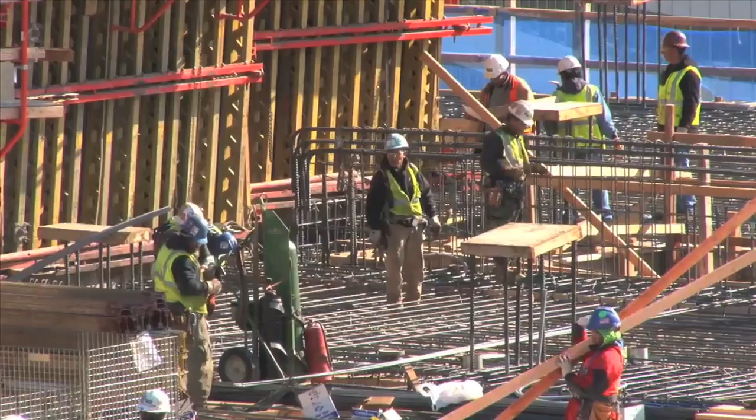The built environment provides the backdrop to our everyday lives. It plays a significant role in forming our natural, economic, and cultural perspectives. There are enormous challenges facing our planet today, and the built environment, as one of the main consumers of energy and resources, offers us a plausible framework to address these issues. Green building gives us a viable way forward in constructing healthy indoor and outdoor spaces, reducing our collective ecological footprint, and in taking our next great leap as a society in the necessary transition to a sustainable built environment.

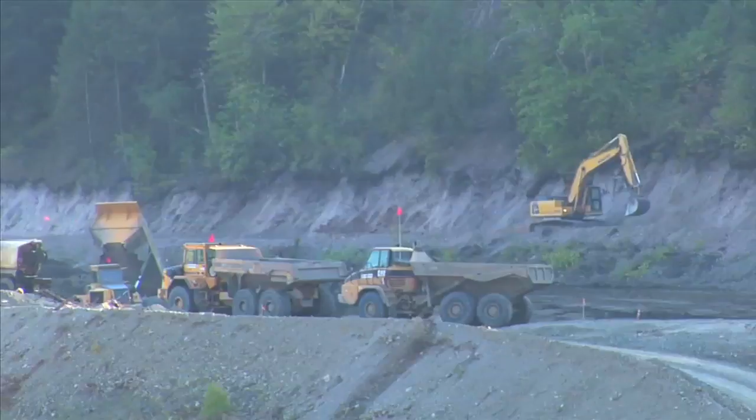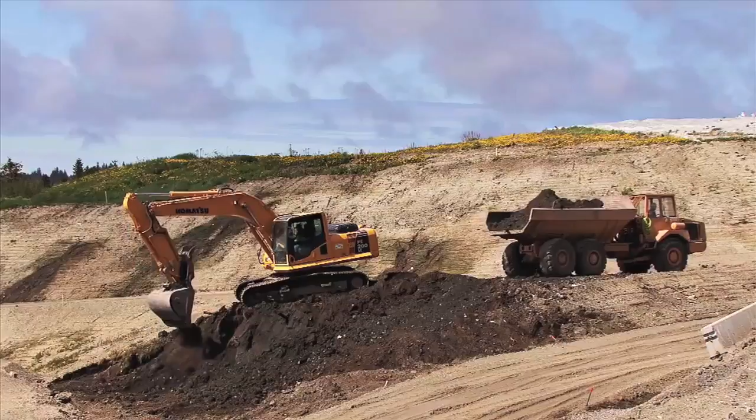Buildings consume significant resources during their design and construction, both in terms of capital and raw materials. The clearing of land for development, which in many cases involves forest clear cuts and bulldozers, throws the delicate ecosystem right out of balance. This doesn't even mention the extraction, manufacturing, and transportation of these building materials, which pollutes the air, land, and water. Sustainable design and construction, often called green building, is a fundamental necessity to help us blunt the worst effects from climate disruption. Green building reduces environmental damage and pushes project teams to reach ever higher in pursuit of regenerative buildings, which inherently do more good than harm to the natural environment.

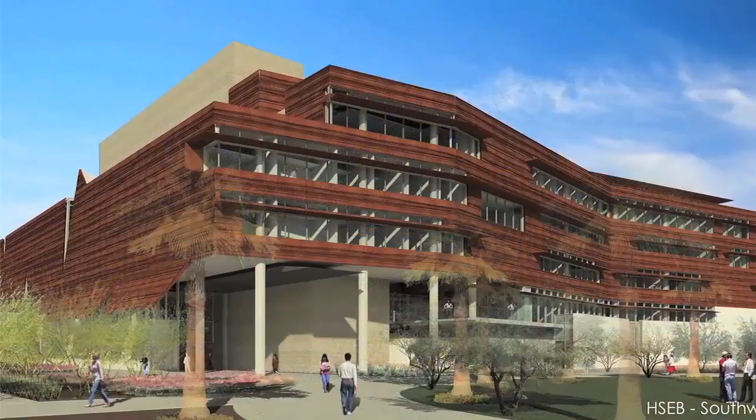The U.S. Green Building Council was formed in 1993 to promote and encourage green building. The mission of USGBC is to transform the way buildings and communities are designed, built, and operated, enabling an environmentally and socially responsible, healthy, and prosperous environment that improves quality of life. USGBC develops the LEED Green Building Rating System as a primary tool in service of this mission. LEED stands for Leadership in Energy and Environmental Design and recognizes best-in-class design and construction practices. This comprehensive free online course will provide you with everything you need to know to pass the LEED Green Associate exam, which demonstrates an understanding of these environmental imperatives and a basic understanding of the LEED Green Building Rating Systems.

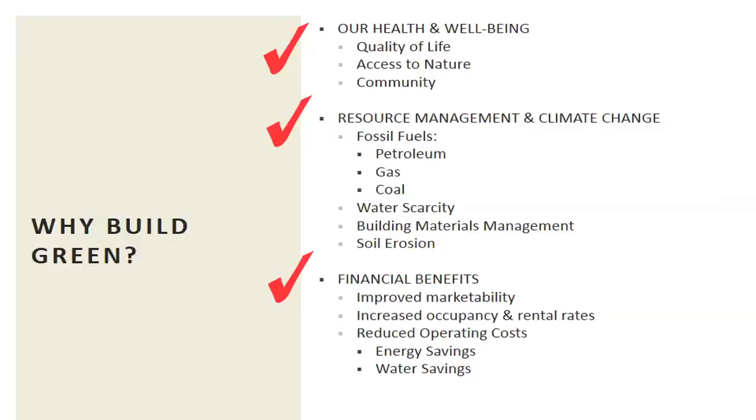Following the idea of the triple bottom line, we consider how each of the three aspects relates to the built environment. Our health relates to people. Resource management is the planet or the environment. And finally, the financial benefits relate to economics and profit, which definitely deserves a place in this triple bottom line.

With LEED fundamentally an instrument of market transformation, it's important for LEED to engage building project teams by tying these program requirements—collectively known as credits, prerequisites, and minimum program requirements, more on that in a bit—to specific goals that the LEED program is trying to attain.

Now let's talk about the three concepts that are at the very heart of this course: USGBC, GBCI, and the LEED Green Building Rating System.

USGBC is the United States Green Building Council. The vision of USGBC is that buildings and communities will regenerate and sustain the health and vitality of all life within a generation. This represents the long-term view of USGBC.

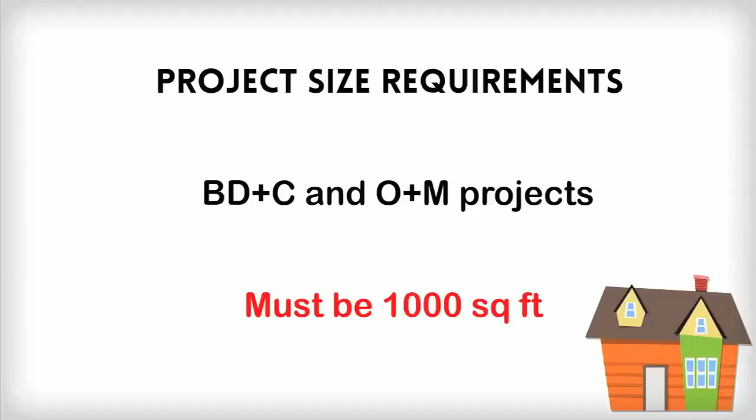Interior projects can be as small as 250 square feet, so they can be pretty little, but you can't have a fuel station kiosk or something like that qualify. Now, LEED for neighborhood development projects need at least 2 habitable buildings, and they have a maximum size of 1,500 acres.

And then finally, LEED for homes projects must meet the definition for a dwelling unit, which includes permanent provisions for living, sleeping, eating, cooking, and sanitation. What this means is that a dorm room with a shared restroom could not be a LEED for homes project.

However, the building as a whole could be eligible. To contrast that, your typical apartment that does have all of those provisions that make it a dwelling unit - sleeping, eating, cooking, sanitation, and living quarters - would qualify for that minimum program requirement.

So let's take a closer look at number 2 here when we talk about LEED boundaries. The LEED boundary needs to include the project area as well as parking if it's applicable. While this means that there can be more than one acceptable boundary for a project, these are declared by the project team and either accepted or rejected at face value by the LEED reviewer. So the project team has a degree of discretion.

The one commonality that all LEED project boundaries absolutely need to abide by is that they have to be consistent across all credits. And ultimately, the LEED reviewer has to accept the project team's designation of that boundary.

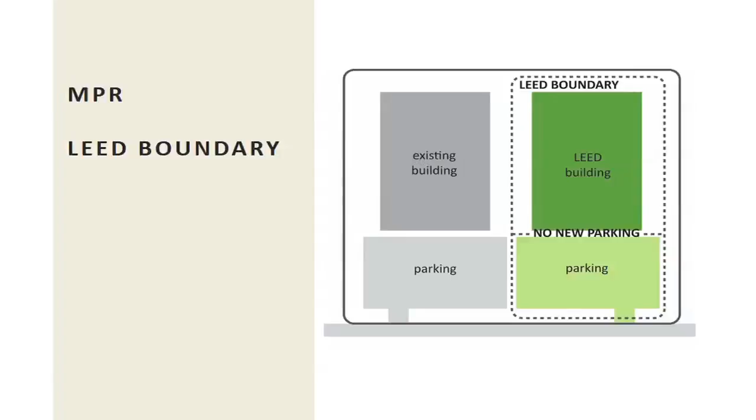Some projects may involve multiple concurrent LEED applications or be located on a campus with shared resources. These can comply with LEED using the campus guidance document provided by USGBC. Let's take a look at what that means.

The campus approach uses the site area of the entire campus for certain eligible credits. For example, rainwater management is a credit in the Sustainable Sites category of LEED, and it involves managing the rainwater that falls on the site and, generally speaking, infiltrating it on the site. It's a little more complex than that, as we'll see when we get into that category, but big picture, you need to infiltrate the majority of that rainwater on your site.

There may be cases where it's most appropriate to infiltrate it on a different parcel of the same campus. This guidance document clarifies how LEED projects can do that within the scope of the program. So for rainwater management, you're free to infiltrate it anywhere on a contiguous portion of the campus—it could be 100 feet away, or for very large campuses, a mile away. The critical part is that it's infiltrated on the campus master site itself.

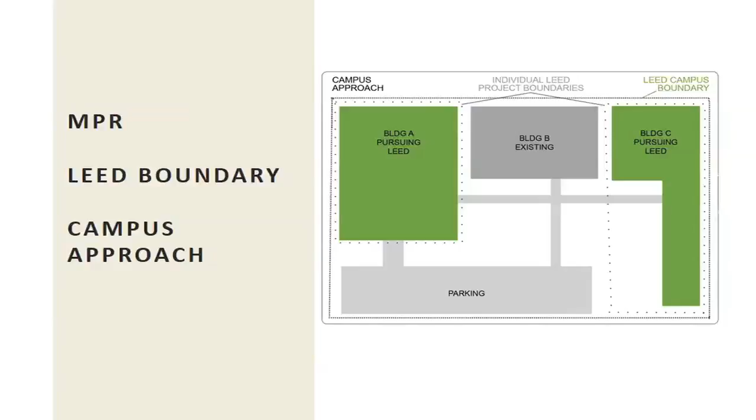Another shared element would be parking. The LEED project boundaries don't include the parking, but the LEED application would need to address the parking attributed to the building—in this example, accessible to Building A and/or Building C occupants. So the parking spaces need to be factored in where appropriate, but the parking lot itself, and things like the construction waste of creating it, would not be included.

LEED uses a term called FTE that's pretty important—it comes up a lot within the rating system. FTE is short for full-time equivalent. Let's take a look at what that means.

One FTE equals one individual in a building for 8 hours a day, 5 days a week. Another way to think about it is one person in a building for 40 hours every week—it doesn't have to be a set number of days, really it's just hours per week. So one individual could equal exactly one FTE, but say a part-time employee who works 6 hours a day, 5 days a week, would not be an entire FTE—they'd be a fraction of an FTE. If it was 6 hours, that would be 3/4 of an FTE for that individual. It's also possible for a single individual to count as more than one FTE.

This matters because we look at FTE to define how many uses per day certain building amenities will see. For water fixtures, you use the FTE calculation to determine how many times occupants will use those flush and flow fixtures during a basic day. So a part-time employee who's there 4 hours a day would be expected to use those same facilities only half as frequently as a similar individual in the building for 8 hours a day.

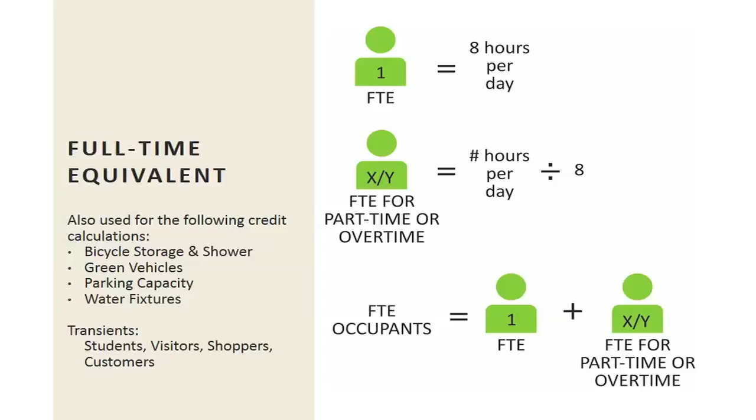So now that we've talked about the minimum program requirements necessary for a project to even be considered for LEED registration, let's take a look at how many of these rating system adaptations, such as LEED for building design and construction, new construction, or LEED for operations and maintenance existing buildings, apply to buildings at different points throughout their life cycle. All of these rating system adaptations are listed along a timeline axis based on design, construction, and operations.

Now, while all of the rating systems, with the exception of operations and maintenance, cover both the design and construction of the building, the operations and maintenance rating system really comes in after the fact and is suitable for either buildings that are in place today, or maybe a building that either did or didn't get a new construction certification and is looking to demonstrate operational excellence through a LEED O&M certification.

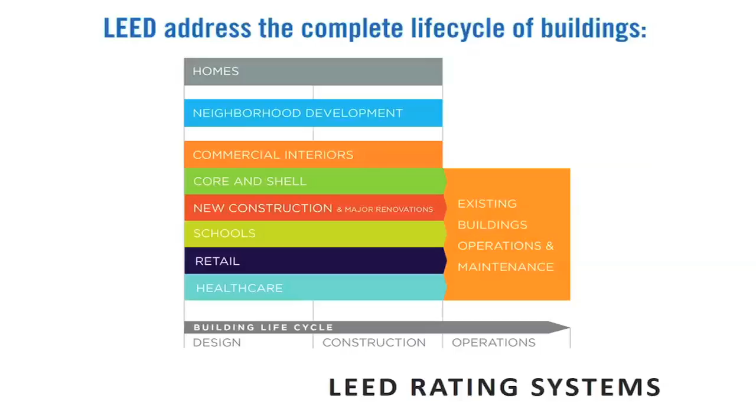It is possible, with that in mind, to have a double LEED certification for a building. So while, say, a new office building's going into a downtown core, it can certify under LEED for new construction, and then it can additionally get that O&M certification. So it can have a plaque on, for example, each side of the entry doorway.

So let me first clarify a term which we've touched on a couple of times. The term rating system refers to that top order category, so that includes building design and construction. And the term rating system adaptation refers to the specific suite of credits applicable to a project based on its building type, such as a school.

So let's take a look at where each rating system is used and then talk about those adaptations. First rating system we talk about, and the one that's really the primary focus of this course, and it's certainly the most well-known LEED rating system, is LEED for building design and construction. You'll also hear me use the term BD&C, that's really just the acronym here. So within that one rating system are these 8 adaptations: LEED for new construction and major renovation, LEED for core and shell development, LEED for schools, retail, data centers, LEED for warehouses and distribution centers, LEED for hospitality, and finally LEED for healthcare.

These projects are whole building design and construction, or major renovation. So a new building, with the exception of LEED for homes, would always fall within this category. Now, the major renovation part is a little bit tricky.

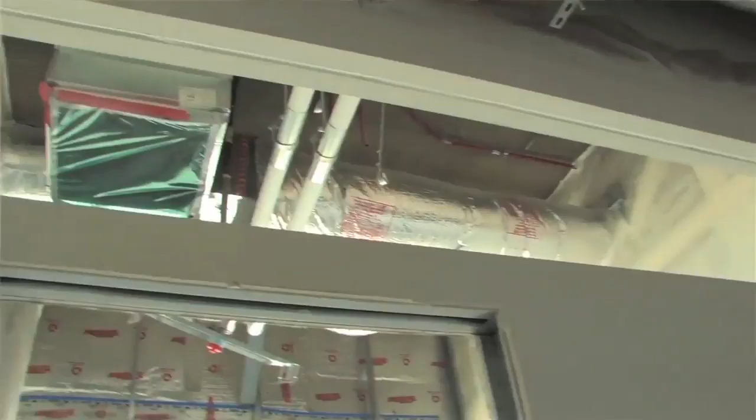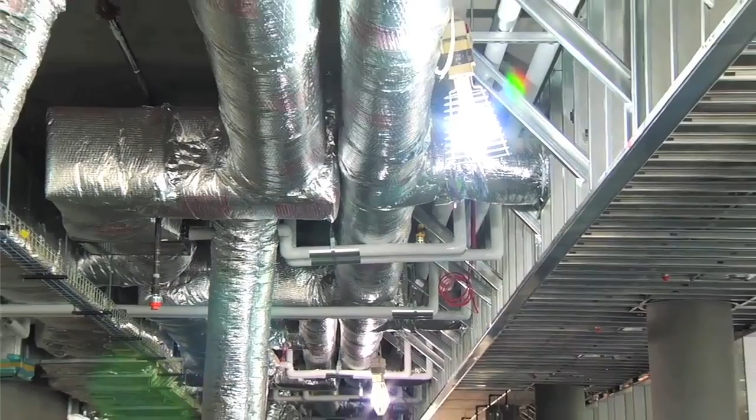There's kind of a fine line between what would be a LEED for operations and maintenance project versus a LEED for building design and construction project. And really the important factors are how significant this renovation is. So there's going to need to be a major HVAC, or heating, ventilation, and air conditioning, renovation included within the scope. And the reason for that is that there are commissioning requirements fundamental at the prerequisite level within LEED for building design and construction. And if there is no new or major renovation to the HVAC system, it's not necessarily possible that it could even be commissioned.

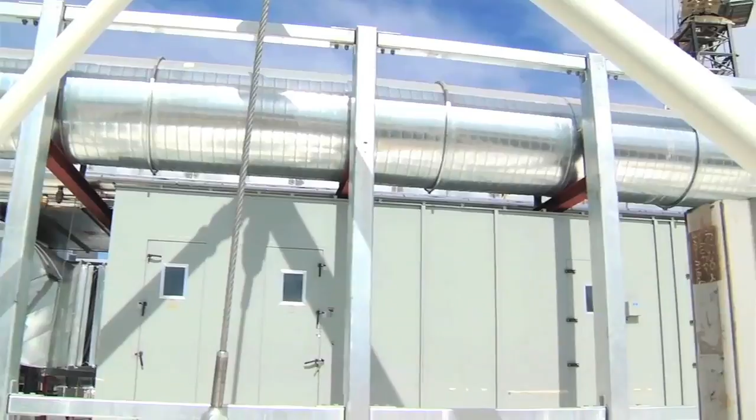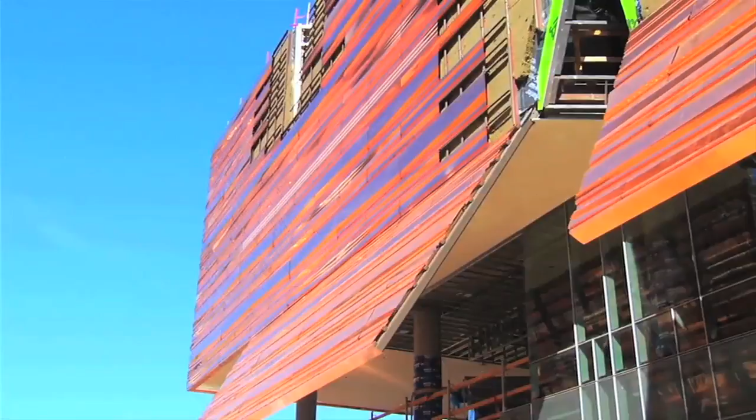In addition, there needs to be significant envelope modifications. And that's really not an absolute, in the sense that if for some reason you found yourself with an existing building that was already sufficiently energy efficient, then it could technically be possible, but that's really going to be the outlier in terms of likelihood. Whereas if you go into a major renovation project, it's quite likely that this is an older building where the glazing system and insulation really isn't up to par with where it would need to be to meet those minimum energy efficiency requirements of LEED.

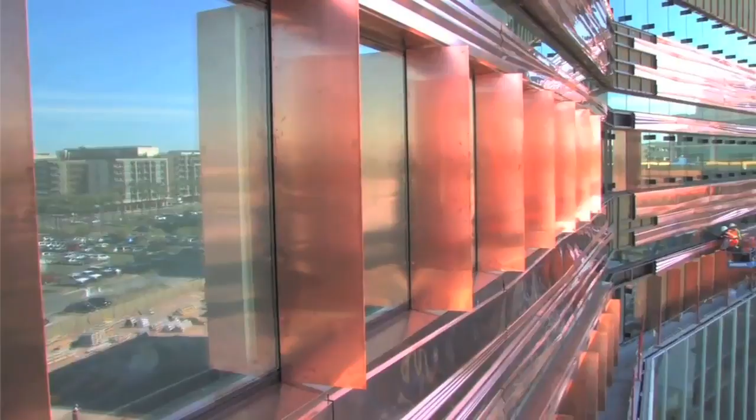Now I'll mention one quick distinction. The core and shell development project is really much different than the rest of these. Core and shell certification does not include the building interior. When we talk about the interior design and construction rating system, those often are projects within a larger building and are exclusive to the interior, whereas core and shell is the complete opposite. That's creating the core and shell of a building while leaving the interiors incomplete, or at least outside the scope of the core and shell development project. So that would be not for a completed occupiable building, but just for that core and shell.

Now, the next rating system we'll talk about is interior design and construction, or ID&C. There are 3 adaptations here: commercial interiors, retail, and hospitality. These are complete interior fit-outs of a tenant space. It may be that they're moving into a new empty core and shell space with or without existing lighting or heating, ventilation, and air conditioning, or it may be that they're doing a new interior space, remodeling one that was previously done. So either type of project fits within the scope of ID&C, but it's fundamentally the interior only.

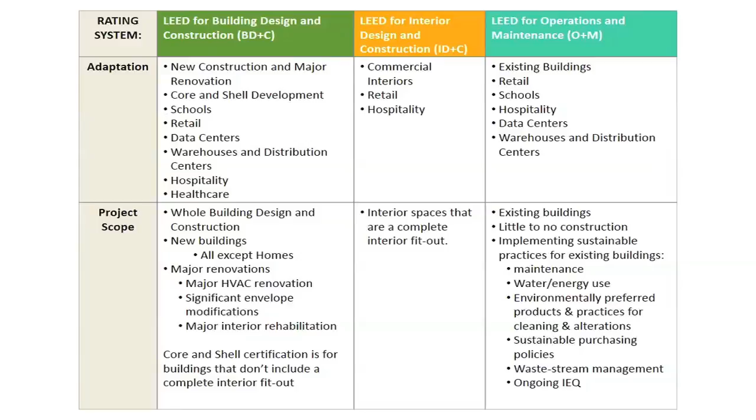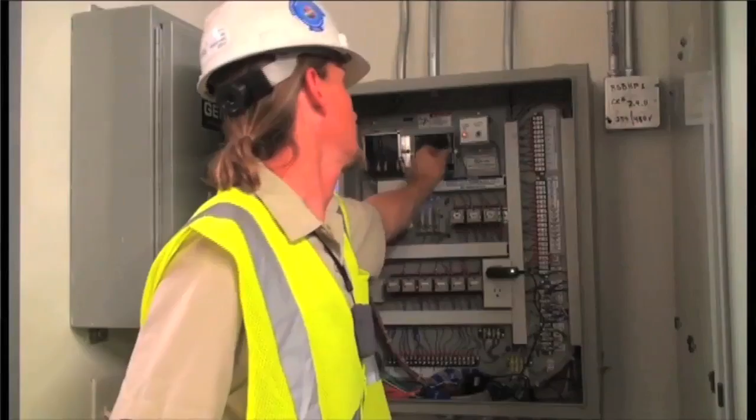And the last rating system we talk about on this page, and then we've got 2 more to cover, is the LEED for Operations and Maintenance program. There are 6 adaptations here: existing buildings, retail, schools, hospitality, data centers, and warehouses and distribution centers. Now these are already completed buildings, and there's typically little to no construction required as part of the O&M certification process. There may be a remodel or that kind of thing that happens in parallel with the O&M certification effort, but it's not required to meet the program requirements. The program instead focuses on sustainable operational practices such as maintenance, water and energy use over time, processes and purchasing policies, waste stream management, and an ongoing commitment to maintaining exceptional indoor environmental quality.

Now, our last 2 rating systems are LEED for Homes and LEED for Neighborhood Development. Both of these have 2 adaptations within them. LEED for Homes has the homes and multifamily low-rise adaptation and the multifamily mid-rise. The project scope here is single-family homes or multifamily residential buildings up to 8 stories. Now, those very large residential projects, say a 9-story condo building, that would be LEED for New Construction. Additionally, there must be at least 1 complete dwelling unit within the building, which includes provisions for its own cooking and its own restroom.

Now, there is a distinction between these 2 adaptations, and that's based on the number of stories in the building. A 1 or 2-story building would always fall into that first adaptation, the homes and multifamily low-rise. Anything from 6 stories and up to 8 would be multifamily mid-rise. Now that mid-range, the 3, 4, or 5-story project, could go either direction depending on the Energy Star category that it fits into. The Energy Star program is pretty important across many of the LEED rating systems, and they use a parallel set of criteria to place these homes in one adaptation versus the other, depending on how Energy Star sorts them.

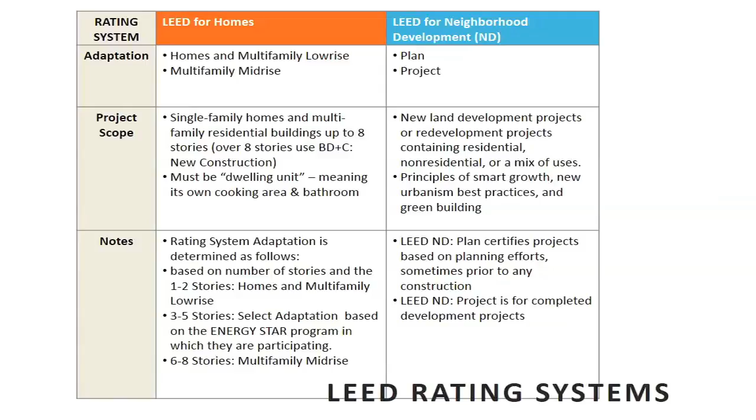And then our final rating system is LEED for Neighborhood Development. There are two adaptations here, and they represent different scopes of what could be the same project. On one hand, we have plan, which represents the planning effort itself and could even be secured—you could have that plan certification in hand before you even break ground on the neighborhood. Now, the project certification, that's really the completed neighborhood, representing a completed neighborhood that's been assessed to meet all of those principles of smart growth, new urbanism best practices, as well as sustainable green building.

So we're trying to show a lot of information here on this one slide, and it may be a little difficult to read, but let's take a look again at those rating system adaptations and how they line up under those rating systems, which are parallel to the distinction made for reference guides. USGBC has created resource books for these rating systems, called reference guides. Each rating system has its own reference guide, and within that reference guide are all of the adaptations represented here on your screen. We've got 8 under BD&C, all the way down to the 2 versions of LEED for Neighborhood Development. Now, the most widely used reference guide is the reference guide for building design and construction, shown on the left here in this graphic.

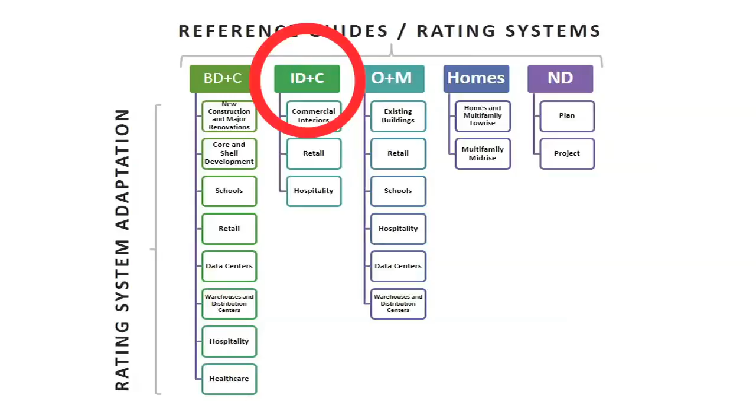The adaptations found in just that one book are NC, CS, schools, retail, data centers, warehouses and distribution centers, hospitality, healthcare—so it's actually a pretty thick book. The interior design and construction book has commercial interiors, retail, and hospitality, and so on. The final thing I'll point out is that these line up not only in terms of rating systems and reference guides, but also in the same distinction between the same 5 categories when we're talking about specialty credentials available as a LEED AP.

You'll recall that there are 5 specialty credentials available for LEED AP credential holders, which is the optional next step after you've completed your LEED Green Associate credential. These 5 categories are universally used in all 3 of those distinctions.

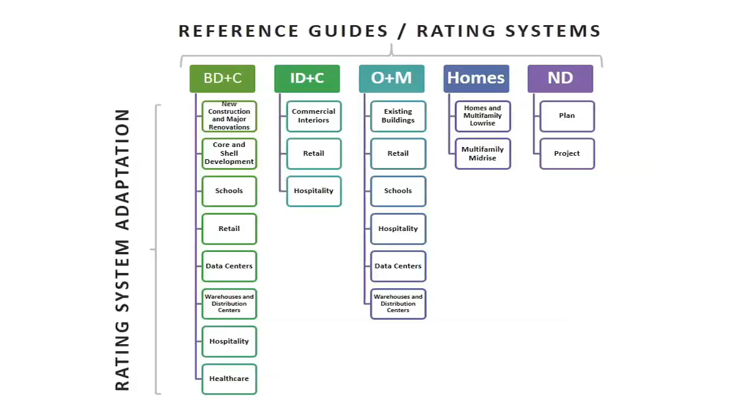We have several sample questions here as part of this course, and just to get you oriented a little bit, what we'll do is read the question and then give about 10 seconds so you can jot down your answer on a notebook. If you feel you need more time, feel free to pause the presentation, record your answer, and then hit play to see if you've gotten it right.

So our first question: what is the first level of LEED certification called? Again, about 10 seconds, and then we'll look at the answer.

Now our next sample question. An existing building on a campus is going to be renovated. The building will only be repainted and some light fixtures will be replaced. Which LEED rating system adaptation would you use?

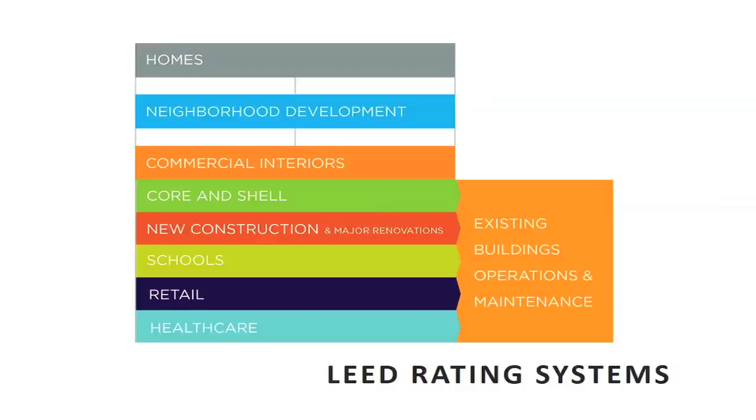So now let's look at the components of each. Within each LEED rating system there are categories, and within most of these categories are credit prerequisites. These offer no points to your project, but fundamentally every single prerequisite needs to be achieved. If even one prerequisite is not completed by the project team, the building will not be eligible for LEED certification.

So when considering LEED for a project, the next step after determining that your project meets those minimum program requirements, or MPRs, is to make sure your project can meet all of the prerequisites for the appropriate rating system adaptation. In addition to prerequisites, there are also credits within each category that offer points to your LEED project to determine the certification level—this includes LEED Silver or LEED Gold, as we've discussed.

Credits can be worth a different number of points because they don't all have equivalent environmental benefit. So while we have 100 base points, those same 100 points are spread across several credits, worth in some cases up to 20 points each. Some of these credits offer a way to go above and beyond, known as exemplary performance, and those points are actually tallied in the bonus category we've talked about—the innovation category.

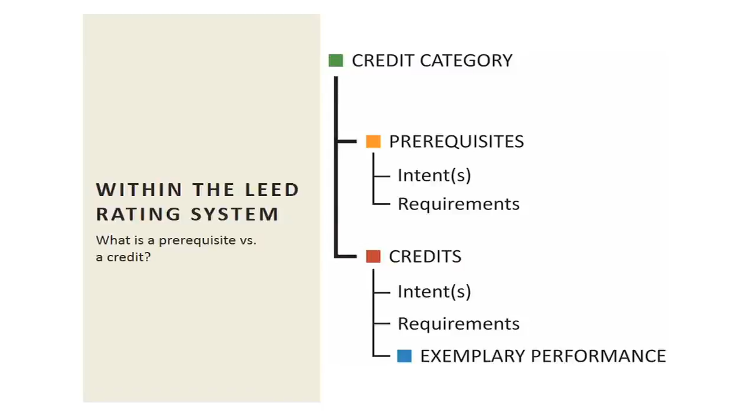Now these 6 categories, 5 entries, but we group sustainable sites and location and transportation as they really have a lot of parallels between the two. These categories represent the core categories, and they are used in all of the rating systems with the exception of LEED for neighborhood development.

LT is short for location and transportation, and deals with site location, transportation, as well as the connection to the broader community.

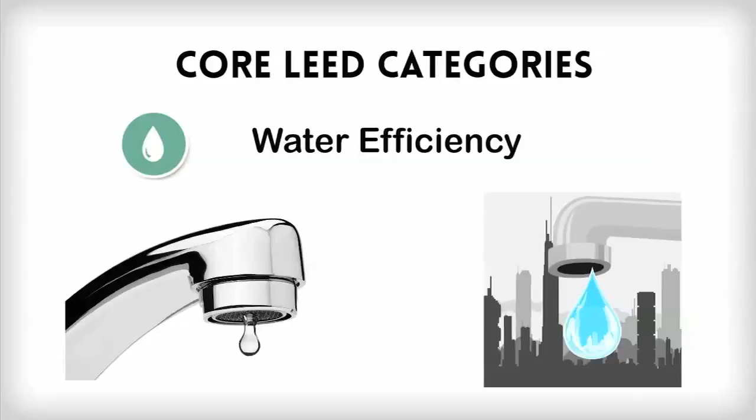The SS category, for sustainable sites, represents site selection, site development, and how the project fits into the fabric of the local ecosystem. The WE category stands for water efficiency and addresses both indoor and outdoor water uses, and innovative technologies such as strategies to reduce the amount of potable water that you need in your cooling tower.

The EA category, or energy and atmosphere, looks at using energy efficiently, reducing the grid sourcing of energy needs, and then operational optimizations, including minimizing the direct atmospheric damage that can be done by refrigerant.

The MR category, or materials and resources, addresses life cycle impacts. This includes recycled, regional, rapidly renewable, etc., end of life, as well as product disclosures that are really starting to get a lot of traction here within the industry.

And finally, the EQ category, or indoor environmental quality, represents human health as well as comfort within the building and the connection to outdoors.

And then finally we have LEED for neighborhood development. So what we've looked at here is how the rating systems are consistent and similar, and how LEED for neighborhood is very different, as the scope of work for that program is much larger, and for that reason it focuses on other categories that are more broadly focused.

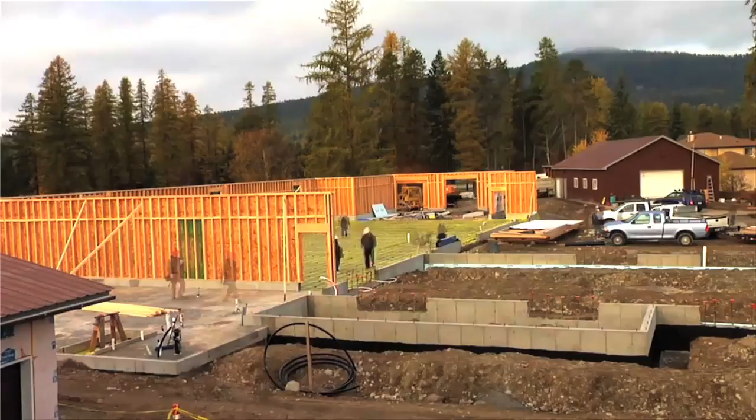Now, the other 2 categories are NPD and GIB. NPD addresses what to build, or neighborhood pattern and design, that is, what to build. Also, how should it feel in terms of the broader community? So should this parcel be dedicated to shops or a park, or should we put some homes here? It also encourages development that is pedestrian-oriented, compact, and diverse.

And finally, green infrastructure and buildings. This encourages both individual green buildings as well as broad strategies such as neighborhood orientation to help set the stage for the future success of these buildings.

Okay, the correct answers here are 1, 3, and 4: that all prerequisites are required based on the rating system adaptation is true. That LEED categories differ depending on the rating system is also true. And that credits within each category offer potential project points, which determine the LEED certification level, is also true. Now, the one that isn't true is that registration is awarded when a project completes all LEED prerequisites. That is false. Registration is granted, not really an award, since there's no assessment of performance that backs up the registration. The registration is granted as soon as the project pays their registration fee and uploads some basic information to LEED Online.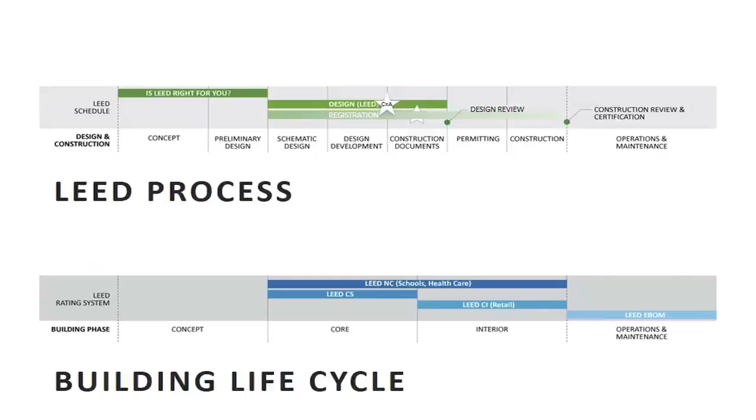Finally, most of the other rating systems, including LEED for New Construction, LEED for Schools, LEED for Healthcare, and really all of the building design and construction rating system adaptations, with the exception of Core and Shell, address both the core and the interior of a building. The operations and maintenance side is addressed exclusively by the operations and maintenance program, including the adaptation for existing buildings. Central to successful LEED projects is an integrative process.

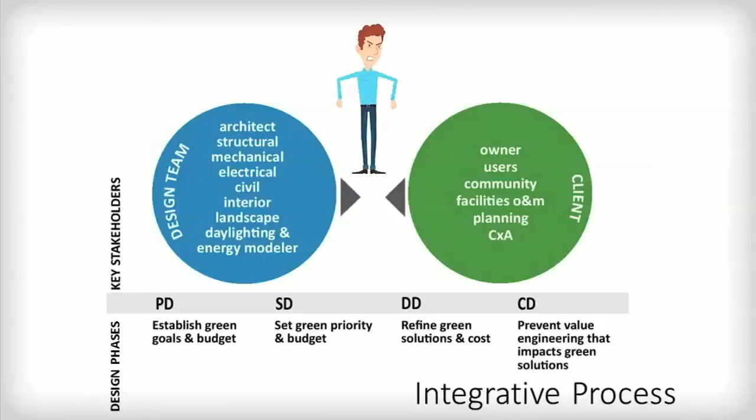So what we see here is a bid project, one where the contractor and their team are not involved during design, but of course the design team and the client or owner are at the table. Now, the typical planning and design process is one of relying on the expertise of specialists who work in their respective specialties, somewhat isolated from each other in their own respective cylinders of excellence.

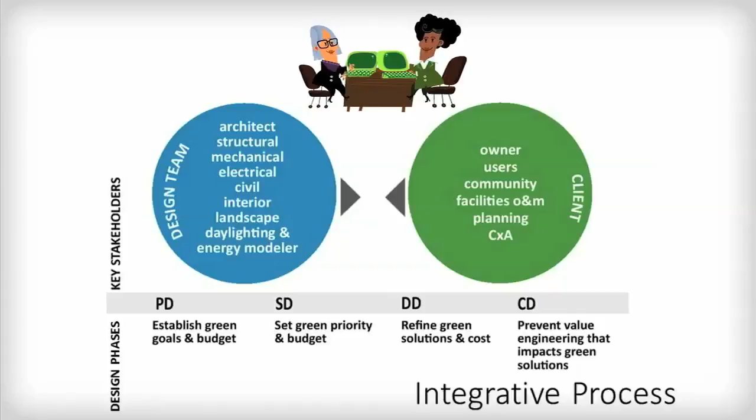Now, the architect is typically the one tasked with being the conduit of communication. So it may be that the civil engineer reports to the architect, who filters that information and disseminates it as appropriate to, say, the landscape architect and the plumbing engineer. That would be essentially where you've got one single party really overseeing all of the communication.

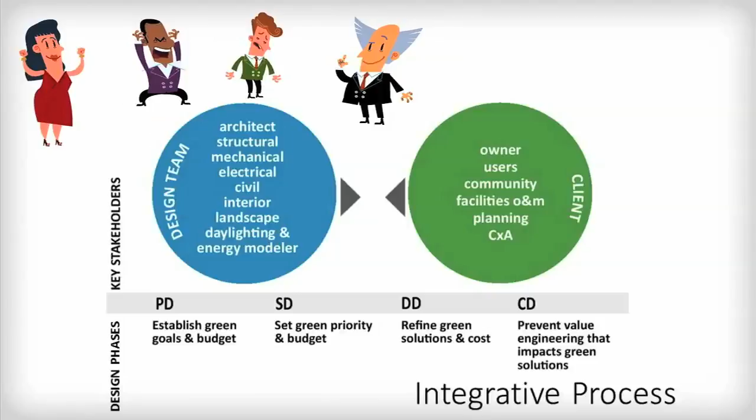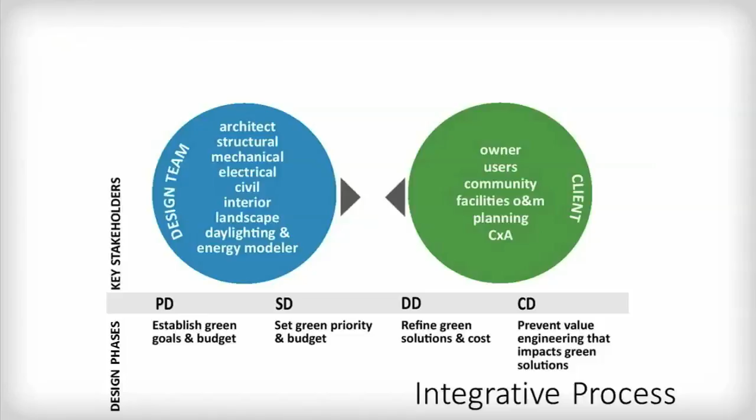Now the integrative approach is one that asks all the members of a project stakeholder community and the technical planning, design, and construction team to look at the project objectives, the building materials, the systems and assemblies, and the like from many different perspectives. What this means on the ground is that several whole team meetings throughout the design phase involving all those stakeholders are convened, and they evaluate the cost, quality of life, future flexibility, efficiency, and the overall environmental impact of these design decisions.

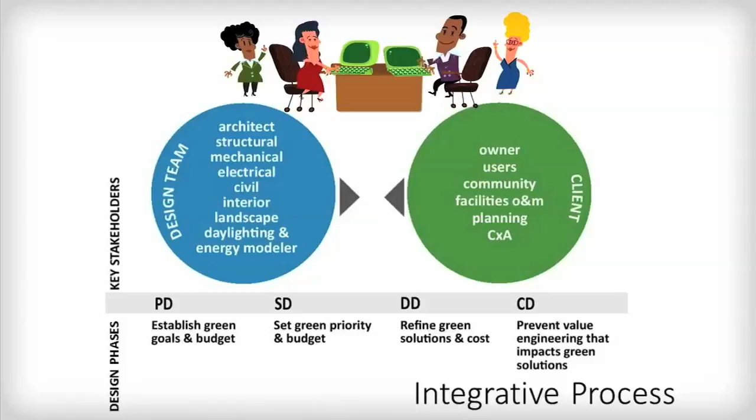This typically begins with a design charrette, sometimes called an eco-charrette if it's focused on ecological or sustainability issues, which is a focused collaborative brainstorming session held at the beginning of a project to encourage the exchange of ideas and information and allow for a truly integrative process to take form.

Now, the integrative approach also works for a design-build project, which is a project where the contractor and their team are part of the conversation from the very beginning. Now, during construction, if the builder and their team members weren't involved during design, they're of course integrated during the construction.

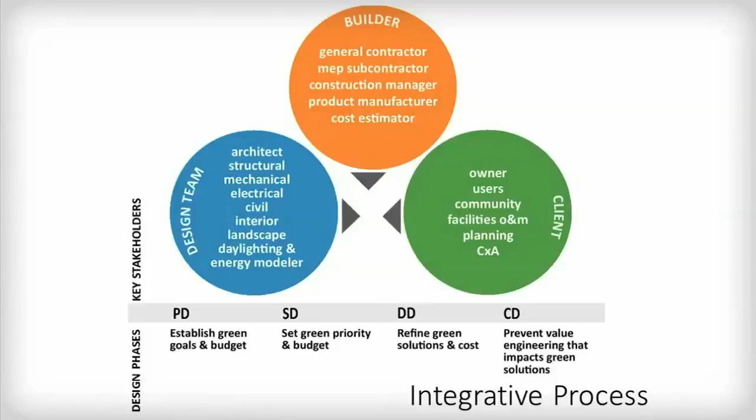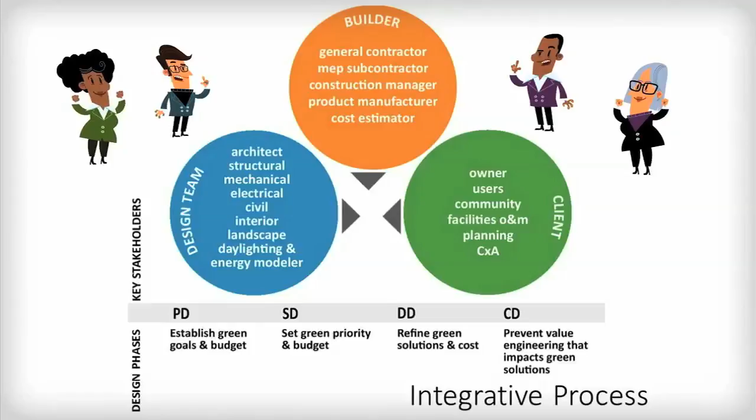Critically, the integrative process does not stop once construction begins. That's so important. So once the construction gets underway, the builder assembles their team, and then ideally a full team meeting brings all stakeholders back together to review the LEED project goals. In this integrative approach, all team members participate at early stages of design and throughout all of design and construction as soon as they come on board with the project.

Now that you've determined that LEED is right for your project through an initial assessment of the minimum program requirements and the LEED credit prerequisites, and you've determined which rating system and adaptation your project is going to fit into, and now that you have a better understanding of the design and construction process, well then what comes next? Let's take a brief look at what a typical LEED process would look like.

So first of all, we've assessed that LEED is right for the project and the project is ready to move forward. First, they would register their project on LEED Online. There are some basic project details that can be edited or updated later—maybe the project name is a placeholder, like Block A project, and later on it'll have a name after a benefactor or the like. So all of those can be changed at a later date. Additionally, you'll pay a flat rate registration fee with a discount for USGBC members.

After that is complete, the project has a registered status and it's free to claim that it is a LEED registered project. Careful though, definitely don't claim it's LEED certified.

Then the project starts completing some supplemental documentation. This includes a project narrative that would describe several aspects of the project, including its use, photographs or renderings, elevations, some floor plans, and then some details, and then finally the LEED project boundary, as we've already talked about in the minimum program requirements.

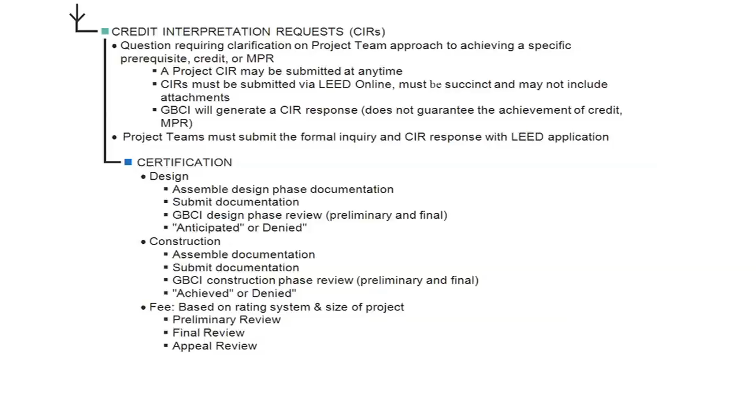They can appeal that credit, and it will go back into review, and they'll be able to submit some additional documentation, maybe to clarify how they actually did meet the requirements and/or intent, or they've changed something and now they're in compliance.

The LEED for Homes certification process is really completely different and is broken up into 4 stages. So first, the project registers. Much like the other LEED rating systems, this includes submitting some completed documentation, including the forms that are applicable to this rating system. You'll also submit payment, and then, what's very different, is you'll establish your verification team.

So LEED for Homes has 3 very unique parties that are only present for the LEED for Homes process. That includes the homes provider, the green rater, and then the energy rater. And during the registration process, that would be the appropriate time for the project team to establish their goals. So are they shooting for LEED certified, or maybe it's a LEED Platinum home?

Then the project would go through its design, construction, and the like, and during construction there's a series of field verification visits. Again, this is completely unique for LEED for Homes—no other LEED programs have a field verification component. So there's a mid-construction visit and then a final construction visit.

Also during this phase is the preparation of several documents that support the sustainable design and construction of this home: the durability plan, the construction documents, or really the drawings and specs themselves. You also need a copy of the contract, which identifies the scope for various trades. You don't have to disclose the dollar numbers involved—those can certainly be redacted—but the contract that describes the scope of the builders is really important here.

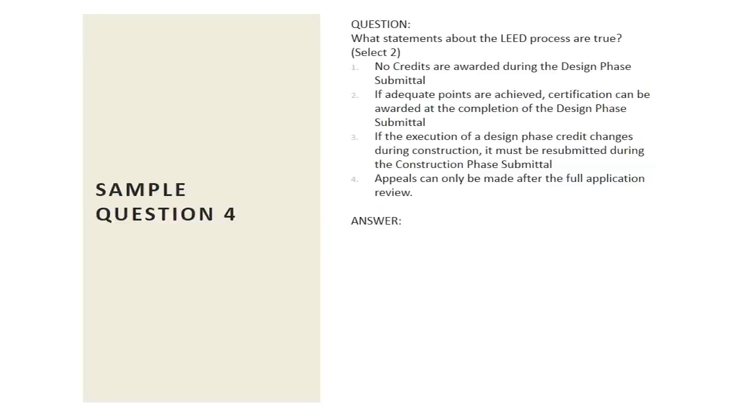Okay, so the correct answers here are 1 and 3. No credits are awarded during the design phase submittal—you'll recall that they're marked as anticipated, not achieved. And if the execution of the design phase credit changes during construction, it must be resubmitted during the construction phase submittal.

That's exactly why they mark it only as anticipated, because things change in some cases very drastically between completion of design and the end of construction—whether it's due to budget issues, redesign, a change in client expectations, or a host of other reasons. Things can change, and LEED understands that, offering an avenue for the project team to correct anything that's been changed.

So for the majority of this course, we'll be covering the prerequisites, credits, intents, and requirements found in the Green Building Design and Construction Rating Reference Guide, with an emphasis on the credits used in the LEED for New Construction rating system adaptation.

So let's recap a little bit of this critical vocabulary, and then we'll jump into the categories themselves. The critical vocabulary here is rating system, which would be LEED for Building Design and Construction. We have rating system adaptation, which would include LEED for New Construction. The reference guide is the source document that describes these programs. The rating system document is also available, and that one's available at no cost, but the reference guide itself is really where all of the great information is held.

The categories, or credit categories, are represented in each of these rating systems. In each category, there are credits and potentially some prerequisites. Each of those credits and prerequisites has intent and requirements, and in some cases offers exemplary performance for going above and beyond.